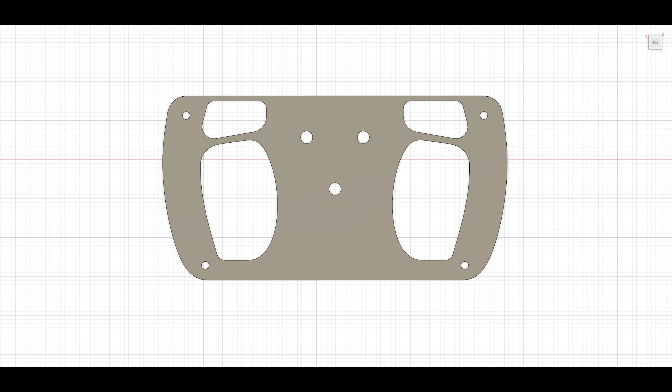You know what? I'm gonna do something a little risky today. There you go. Hello, everyone. So, let's see.

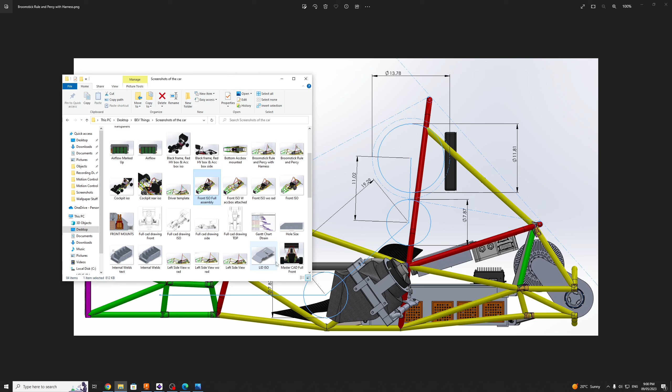So I will try to show you a photo. I'll take this one. Yeah, this one for example. So you can see how it starts from this corner, goes all the way around, wraps, and ends right there. So this is kind of like the allowable part because you gotta bend a tube, and these edges can be welded, but any of these corners, these radii, it should all be one tube, no cuts, no corners.

This is a base representation of what basically a car looks like without any wheels, suspension, stripped down, bare bones. Of course, not the most recent design, this is way back in the day, but it's a good representation of what I'm trying to show you guys. So, the FSAE rules, let's look at them, shall we?

T.1.4.2 is this: the topmost point of the front roll hoop, any vehicle controls must stay below the topmost point of the front roll hoop in any operational position. Basically your hand cannot go above this line. If it does, no tech compliance, and no racing for you. Minus 99 social credit.

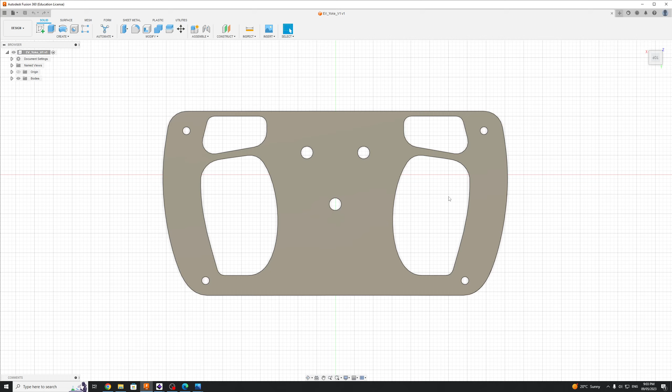So the whole point of today's stream, or today's shenanigans, is basically making little grippos for this cowboy. And by grippos, I just mean this is our water jet aluminum steering wheel, an example of it, or a model.

The whole plan is to basically create something for the drivers to hold so that it's a little bit more ergonomic, easier to steer, because you could use this, but it's going to hurt the driver during endurance runs or when they're trying to go as fast as possible on the track to set their autocross times, which is basically like a time attack. You only get 2 laps per driver.

It's like yeah, it's just a time attack. But yeah, alrighty.

First things first is this body needs to be not that thick. Alright, how about I do this? Because I brought this in from SolidWorks, because I'm too lazy to sketch this up all on my own again. Well, not again, but just do it in SolidWorks because it's a button and a half. What I am going to do is create a new component.

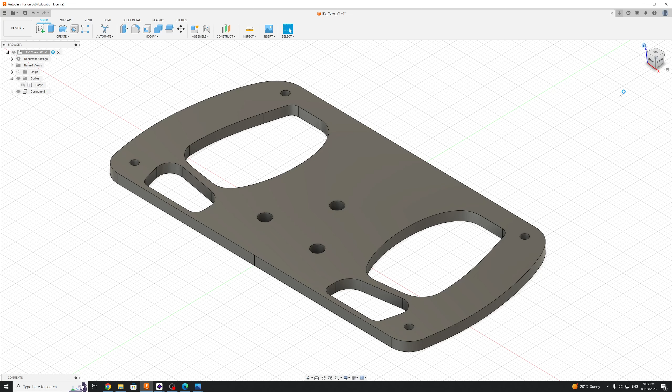Crazy, but yeah, so like I said earlier, the whole point of this is just to create nice little cutouts — I wouldn't even call them cutouts, just 3D printed grips. It's just ergonomics. It would hurt if you were holding a 1/4 inch plate in your hand and really wrenching down on it. It wouldn't be any fun.

And we kind of have to do this. Alright, I'm gonna take you guys back into the forbidden zone, or just straight Fusion. Alrighty.

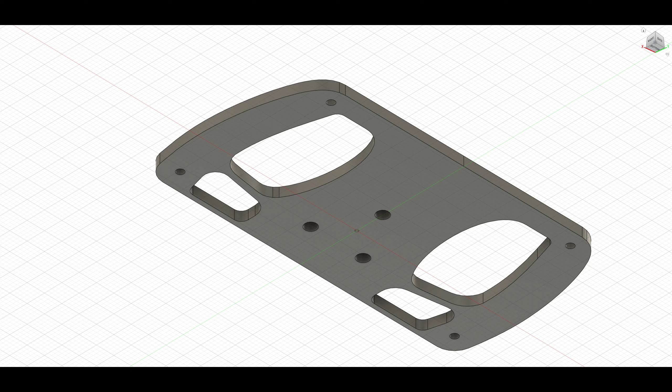Does this go behind the steering? Let's define this. This is the steering wheel. So we will have grips basically on this side, which would be facing the driver, and on the bottom side, away from the driver. So you're basically kind of wrapping your hand around these sections, and we need something to make this a softer edge, basically.

Alrighty, I'm gonna make this my home actually. Set current view as home. Alright, let's go. So basically what I'm gonna start off by doing is probably make a little measly sketch. I don't know how to explain what I'm planning to do, but

The best way I can put this is the way how we currently have the first iteration of grips. Actually, I do have them, so I'm gonna stop this right now. Our first few grips, which you can see right here — well, you can't see them, but they kind of look like that. They're pretty thin, not too bad, but again, whoa.

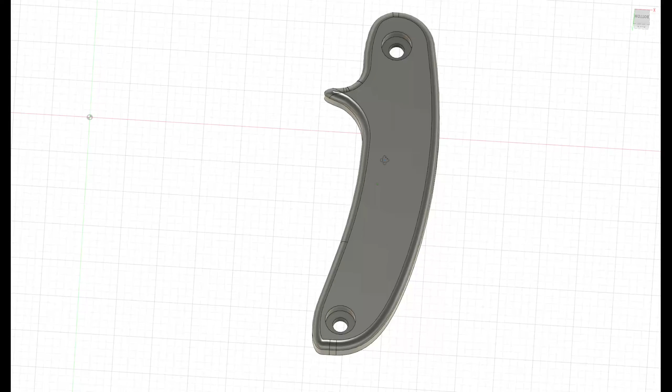Yeah, but then again, these pickle-shaped boys, they're not necessarily the most ergonomic. They still kind of hurt, especially around the thumb area, which is the main thing. For the most part, when you're driving really hard, really fast, you'll oftentimes loop your thumbs, if you're driving your own car, hopefully at a track, at safe speeds — don't do dumb stuff, people.

Oh wait, why am I alt-tabbing? Never mind. Basically, cool.

Where was I going with this? Yeah, you would loop your thumbs around these two regions, and this gives you most of your torque force, or just turning force, because it's easier to hold on over there, and life is better.

Let's set this. Ooh. No, okay. Alright, there we go, I think that's a better home position.

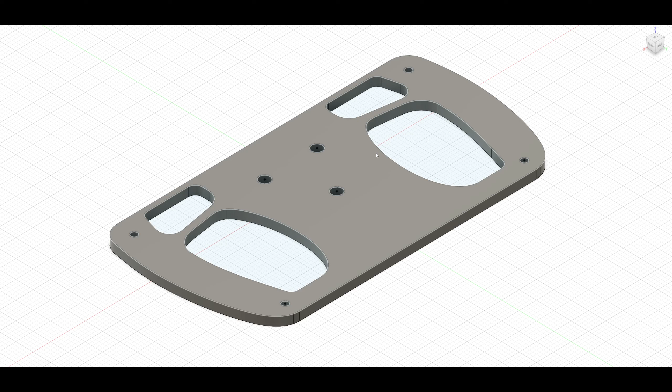So let's begin. I'll start off by bringing just these in as an example. You know, I should probably show you guys how - this would be a good opportunity to just learn Fusion.

So I'll just keep the complete display on and just remove that. Yep, that's probably better. Hopefully you guys don't do anything frisky.

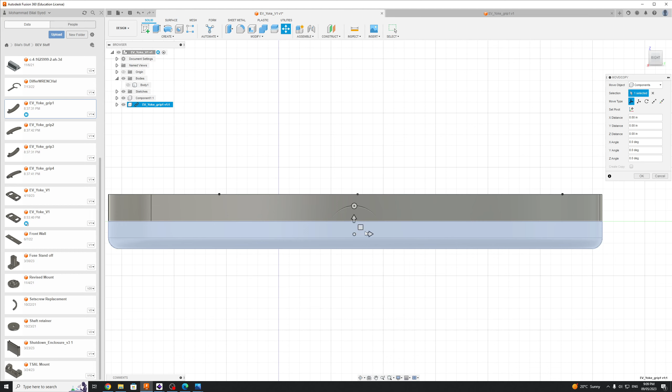Insert that into the current design, and you can see kind of where it sits, which is... ooh, not there. Oh wait, yeah, it actually sits right there. Never mind.

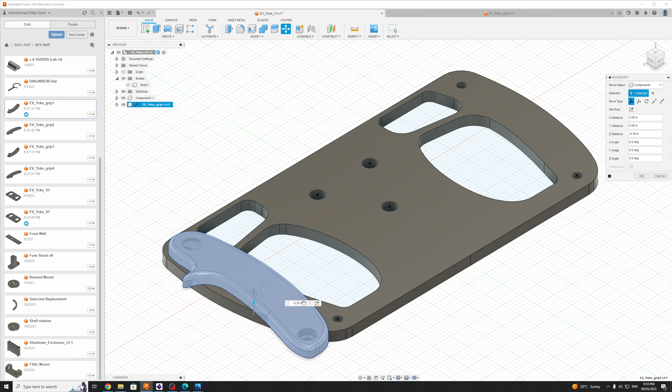But of course, that's not where it needs to be, so be gone. I'm gonna actually reinsert it into the drawing. Change that to 180. There's probably better ways of doing this, but I don't know them yet, so y'all are gonna have to yell at me some other day.

So Fusion, I've noticed, doesn't really have... well, it kind of does have an assembly system, but I don't know, I'm weird. I just haven't used it as much as I have in SolidWorks, or I guess it's not. You know what, let's see how this goes.

Simple, between two faces. Just position. Let's see how this goes.

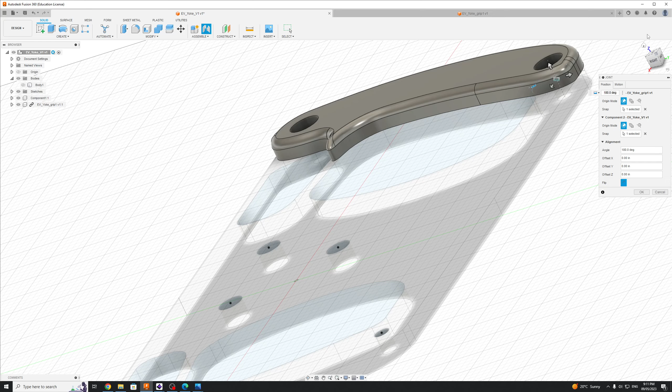Whoa, look at that. Yep, that seems kind of right. And this will actually help quite a bit, but then, well, this is just a representation.

I think I have to redo this all over again, solely because I don't think I can kind of remake these bodies, due to the way that they are. But yeah, I think this is probably a good way of showing you guys what they kind of look like.

So I'm actually gonna change this to an aluminum. Well, it's not anodized aluminum, that's for sure. It's just water jet, because we don't got a whole lot of money.

It looks more like this, but... polished satin. Yep, that's kind of probably what it is. More like - there you go, sir.

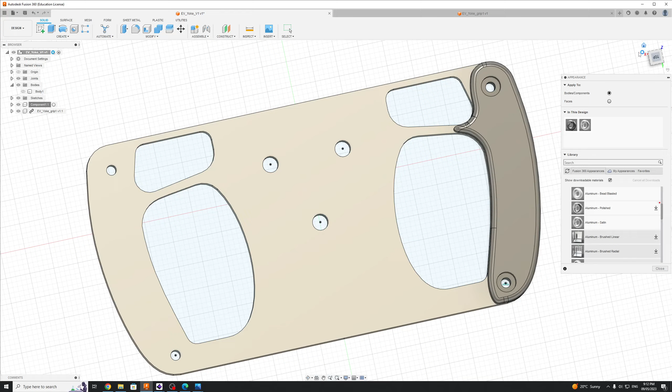Why are you white? Bruh. Said no one ever.

I mean, it's definitely that component. Oh well, I guess if we ever decide to render it - jeez! If we ever decide to render it, it'll probably show up better, but as they say, YOLO swag, young money.

Cool. Just gonna close the rest of these, because why not? Although I may need to come back to them some other time. Cool. Alrighty.

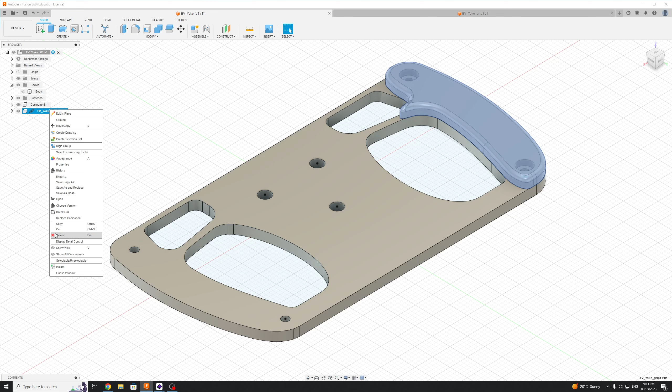Let's get schmoving.

So one of my supervisors when I first started out in the engineering field, basically on my first co-op, or first actually paid job, my supervisor, who also worked in Fusion, told me a lovely little thing that I like to remember, which is the first thing you do in Fusion is create a new component.

Don't just start sketching on the ground, although oftentimes I end up doing that, especially if I know it's not going to be an assembly. But usually when it is an assembly, the best thing to do is to have components. And so that's kind of what I'm going to start off with over here.

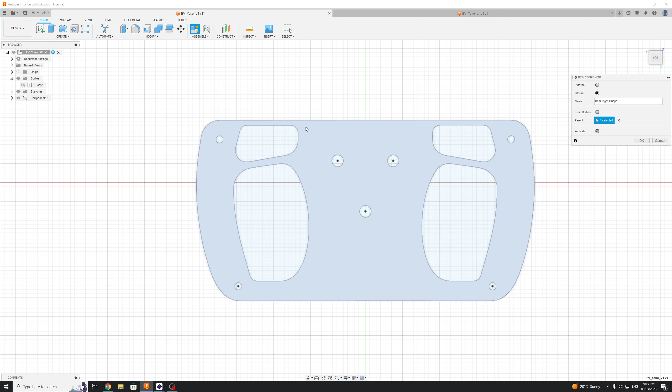This is going to be a fun little naming convention. I'll say this is the rear... right, bruh, god damn it, caps lock. Rear right, the parent here, I'll make that the parent. Although it probably should be something else. Can I rename you, sir?

So you might be wondering what happened, why you'd become glass. Well, the answer is right here, basically in the component tree. You can choose what you'd like to be working on, and the rest becomes kind of translucent. If you want them completely gone, you can press this, or there's probably a better method. I don't know why it's still showing up. Usually it doesn't do that, but YOLO swag, I guess. Well, it's probably because the bodies are... nope, that's fine, I don't know.

Can I kill the body? Can I? Well, I could just do that, but let's just say you don't exist. Can I suppress you? Suppress. Well, can't suppress you, I'm gonna keep you up there. Okay there. Well again, I don't know why I'd be doing that, but YOLO swag. I should really stop saying that.

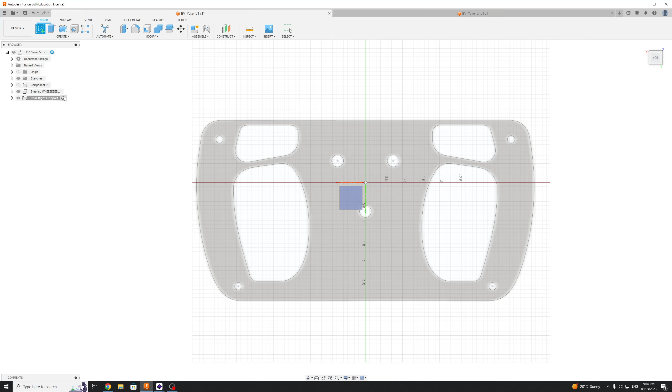All right, let's start off on this grippo. That's the unfortunate aspect of this. Back. Oh well, whatever. So these holes right here, they're basically for fasteners or basically anything else to kind of go in. Yeah, basically they just go in and clamp things to the wheel.

Start. Well, how about this? Start over here. Thing is, we want this to be kind of smooth and sharp at the same time. It's really gonna be hard to explain what I'm trying to do.

Good sir. All right, oh wait a second, why'd you do that? Bruh, okay thanks. Probably have to do it. Oh no, that's not it.

So the interesting thing about Fusion is, if you're making a line - and this is also the same for Siemens NX if you're familiar with it - basically you can make a line like that. Very nice. But let's say if you want to make an arc without having to do the whole shenanigans of making an arc, you can just kind of... okay never mind, guess I don't do that no more. What did it used to? Oh, I think if I start... oh yeah, there you go. If you start a new line, it kind of does that.

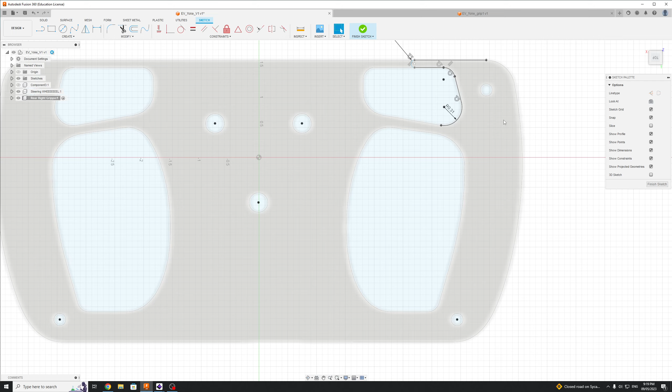Now you might be wondering why I'm not dimensioning things and making sure they're exactly where they need to be. The answer is, I am simply following the contours of this cowboy, of the steering wheel that's made out of glass right now. So technically everything should kind of align itself to it. But as you saw with the blue lines, some of them aren't really liking that idea.

But it's whatever, as I say. Oop, there we go, I have a lovely arc. Yeah, another reason why I really like Fusion is because it lets me do stuff like this. Like, oh come on, come on, where's the point? Where's the point? Come on, there's gotta be a special point. Perhaps there's a spline? Who knows?

Nope, go back, I guess I'll do this last. Oh okay, I see how it is. Interesting, I guess it goes kind of... okay I guess it's just... it's probably better in SolidWorks, but now it is kind of doing its own thing over here. Let's see. Fusion, do your thing. Cool beans.

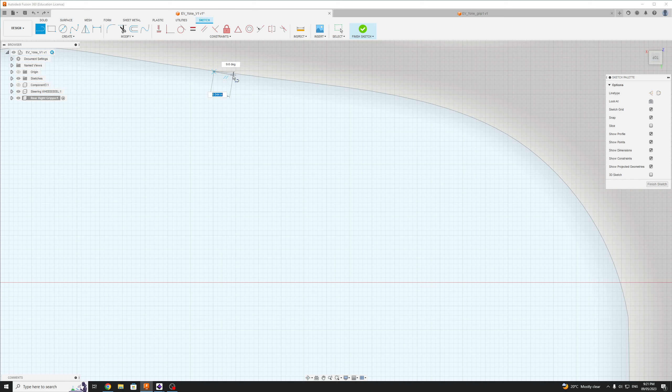So look at that, that's one whole thing. Interesting. You know what, why not? Let's do a thing. Okay, how about we not do that?

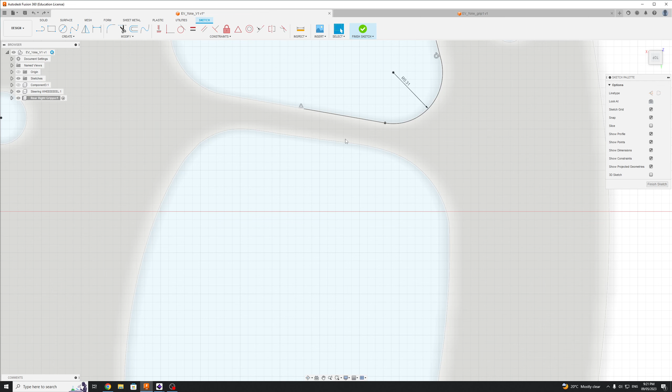Alrighty. Oh yeah, I keep on forgetting you guys can see my entire screen, which is kind of funny.

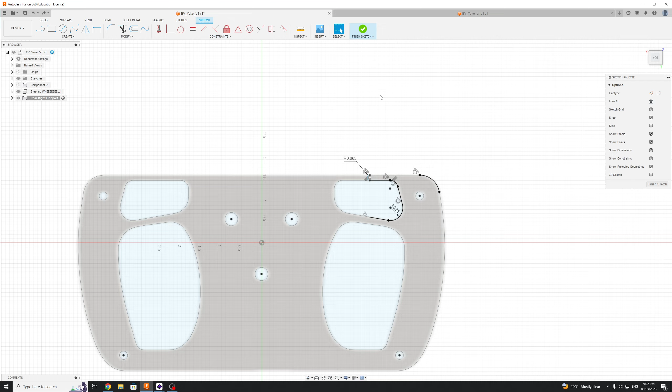Anyways, sorry about that, there's currently a fly running around my room. So if you randomly hear me clap, there was an attempt is all I can say.

I guess we'll start here, sir. Yeah. Better. Oh, okay. Yep, that'll work. Of course not.

By the way, in case you're wondering, I wouldn't call myself a CAD expert, hence the reason why it's taken me 16 years to do this. But, you know, it is what it is.

Ooh, I like that. Why did you... yeah, very nice, we're making some progress slowly. Just getting all the real cowboys done.

Why are you clapping? This is a no-clap zone.

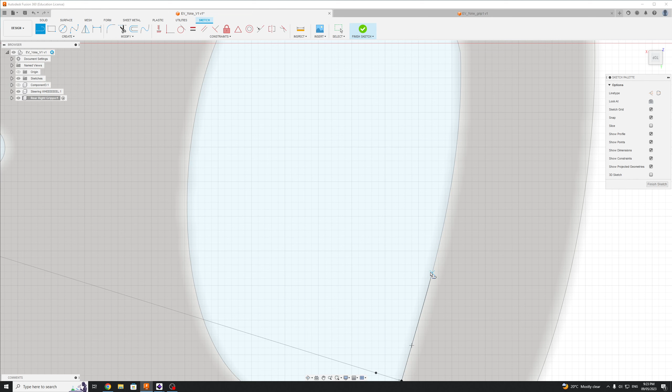In other words, I don't really know what I'm doing here. No! Oh well, what's coming to you? Bruh, the world should go, and everything in it. Ooh, that's interesting.

Oh, there we go, that's the snap point, which I honestly couldn't tell you. Well, I know where the other one is. Well, you know, now that I'm thinking about it, is there a way how I can just project the entire thing on? Project include. Project to project?

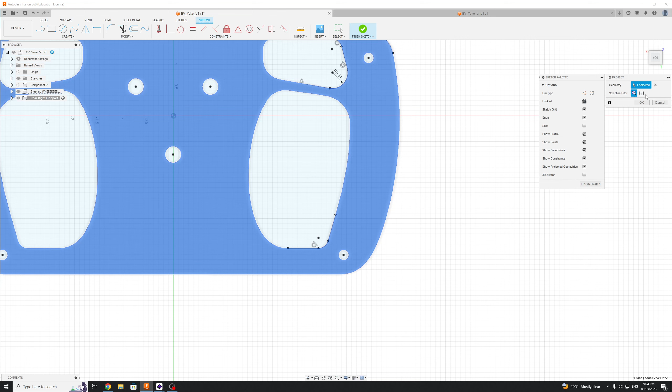Okay, what do you know? I don't need to do anything, I'm just that cool. Well, I don't know. Does this count? Can I? Okay, cool, I can do that.

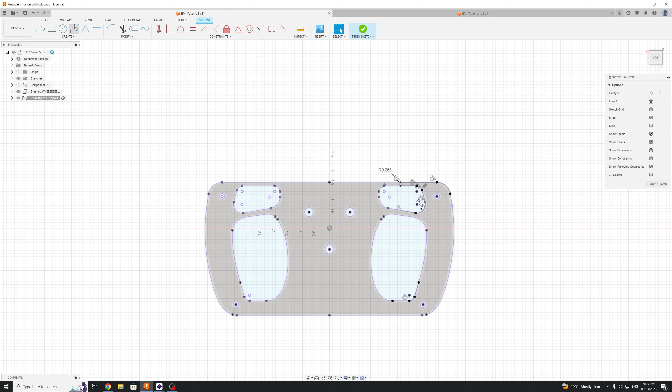Will it let me do funky stuff? No, I don't think it will. Well, let's see. Whoa, okay, interesting. Okay, well.

I'm gonna turn that sketch. Oh, that's the entire sketch. Alrighty, I guess that's good in some ways. Well, let me try something first.

Because the reason... well, I have to come clean, I done goofed. What the done goof is that I'm trying to basically make a grippo out of this little section here. But to the keen-eyed, you'll notice that it's open. It needs to be closed for me to make a grippo. So that's kind of what I'm going to do right now, which is kind of close off sections, or at least a tiny section of it, and pray that it works.

Wait, well, let me try this. Yeah, that'll work. Okay, yeah, that'll work. So I just, long story short, I just need to close off this little cowboy.

Can I kill the rest of you guys? Well, yes. Well, let's see. Ooh, I don't want to break you. That might work. Oh no, come back. Okay, how about this? It's manual mode. It's over for you guys when I can figure out automatic mode.

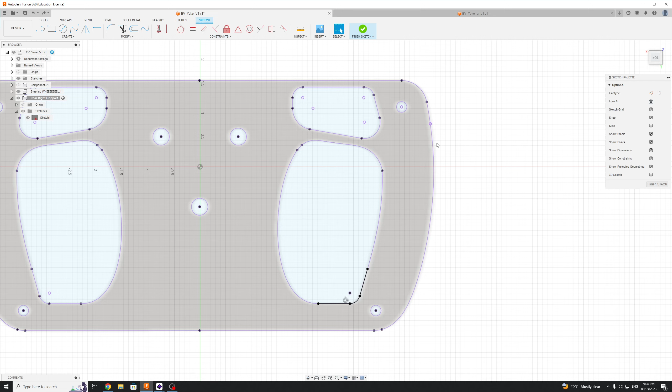That seems fine. Yes. Alrighty.

Come on, Fusion, you know I don't want to do that. As with... Oh, okay, fine, come on. How about... come on! Oh, I guess... oh, I guess that's how I started.

Like I said. Well, I guess it just doesn't like that.

You know what? I think this is a great opportunity to introduce you to my friend, Arc. I don't think this will be a center point arc, but it'll probably be a 3-point arc. So basically with a 3-point arc, you choose where you want it, and then you kind of do this little cowboy thing. I'm probably gonna make it like a perfect semicircle type beat.

Ooh. Okay, I think it likes this one. So, interesting thing is you can see this symbol right here, and if you were keen-eyed, you'll notice that it means tangent. Yeah.

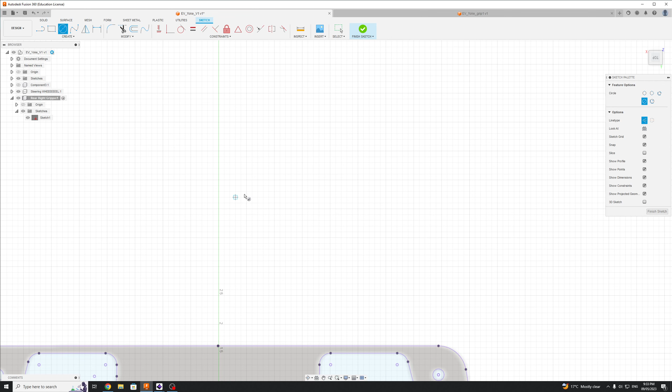I can sketch up a little circle, and of course I'd dimension this to make sure it's perfectly where it needs to be. Let's say I want a circle here, arbitrary place, and a circle somewhere around that radius, but in different positions. You can create construction lines and dimension all of these in different weird, funky locations.

And do any other sort of thing - if you want to make it a solid or real line for simplicity, you can just do that. No, you're not a real boy.

So this is an example of construction. Turn that off. I really do like the sketch palette in Fusion. I wish Inventor, made by the same company, had it. Inventor is, I think, for more professional use, and Fusion is for more hobbyist and startup use.

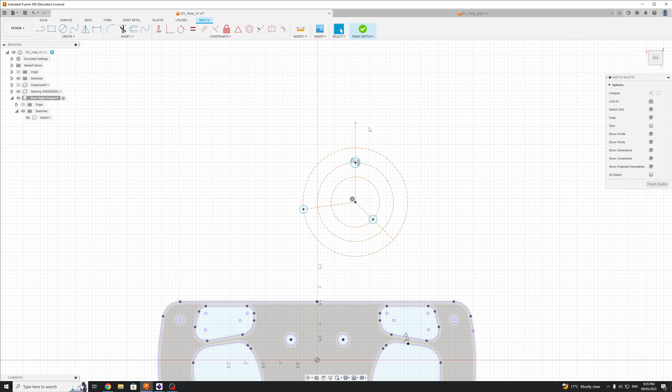I might get a little confused because sometimes I'm looking at chat and also looking at my stream. So if you see me stop and put myself on pause, it's because I'm trying to figure out what you guys are referring to, since I don't know where my stream is at on your screens. To me, time has passed; to you guys, I'm just coming around. But anyways,

Construction lines are these little dashed boys. You can use them to put things at particular angles. I'll give you an example here.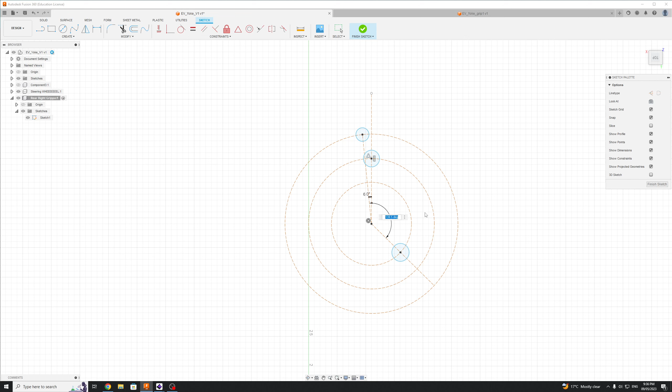Like if I wanted this and this to be at - throw a number out in chat - 6 degrees from there. There you go, it's now exactly 6 degrees. And if I wanted this one to be a random angle, I'll probably put in like there, and Fusion does that. So it's basically that much - that number is probably that many revolutions, and that's kind of where it is.

So it'll help you placehold things, and this is something I used for a project I'll be recreating on stream. I made it and it's a pretty cool thing, because it's using gears and planetary gear systems, or creating one. I wouldn't even know if it's technically a planetary gear system - I'll just call it a ring gear system, because it doesn't really have a sun and planets, just a ring and planets.

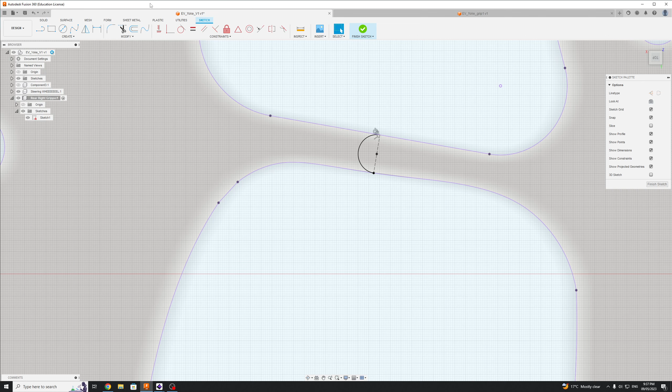But back to this cowboy - alright, I'll just make an arc. So we made a little construction line out of this, and that will help me pinpoint where I want this cow person to be. Alright, that seems kind of fair. Can I... why do you not like this? It's no like, I don't know why it's no like.

Well, it's definitely doing something funky here. I just really hope it does what I wanted it to do. This is a coin - well, delete that. Does that do anything? Nope, did nothing. Coincident with the... if you click and hold. Ooh, control point spline, interesting. Oh okay, well I guess this one. Yeah.

Hype train, hype train, what are you guys talking about? I have no idea what you guys are talking about. Like I said, I can't see my stream, I can only see chat. What's it - YOLO swag, I guess.

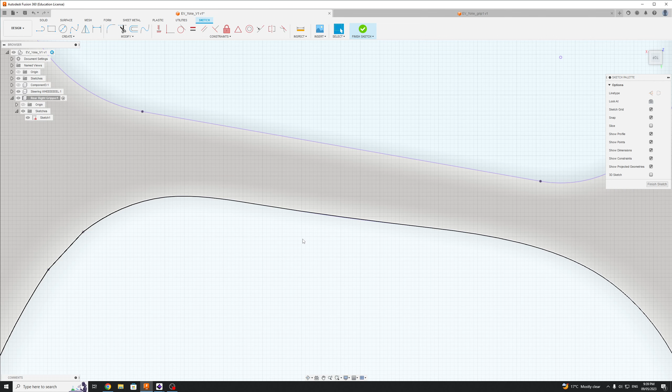Oh, for the planetary gear system - oh yeah, I'll probably do a whole little tiny segment fun thing. This will probably be the first time you might see a little bit of me, which is rather soon, because I don't plan on having a face with this new little shenanigans thing. Words I really should stop using - shenanigans. But yeah, I'm not planning on having a face.

I hope to never repeat what I just said in the exact same way I just did. But absolutely not, you'll see my hands - my lovely scarred up hands. Let's call that fine for now. Okay, we need to do this.

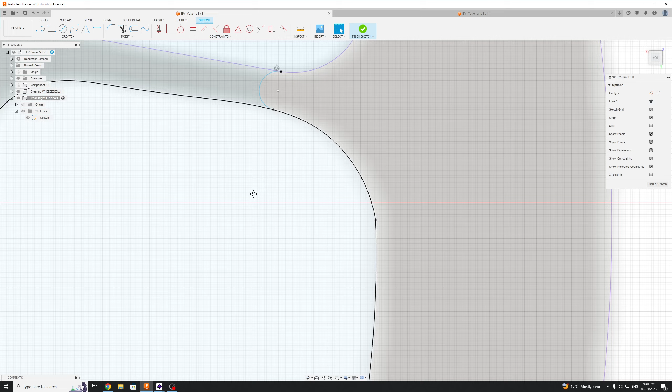You see? Now that I bridged it off, you can see how this is a little piece of this and that is a little, you know. But why are you not at the working? Can you move here? No? Whoa, okay, alright, she's gonna, whoa, okay.

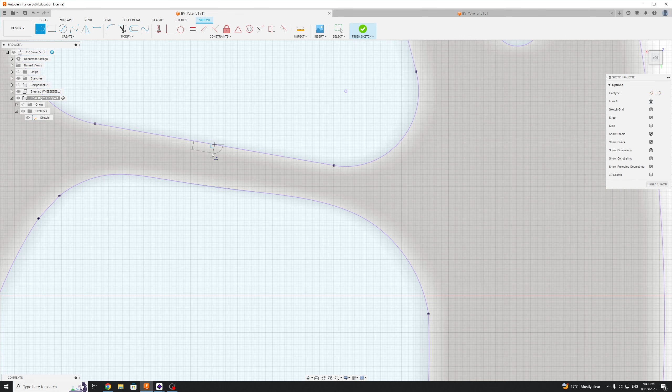I'm gonna delete this segment because I don't know why it's not doing what I want it to do. So instead, I might do a little trick I learned. I wouldn't even call it a trick I learned, it's just a random thing you can possibly do if you're running into the same issue, which is, once I... Well, I'll do this in the next step.

Finish that. Please work. Nope, it... Why you no want it? Why, what?

It's considering this a whole thing, but it's not considering this whole thing. But it's connected there and there. It's almost like a negative. I'm not going to be creating a negative, I want a positive.

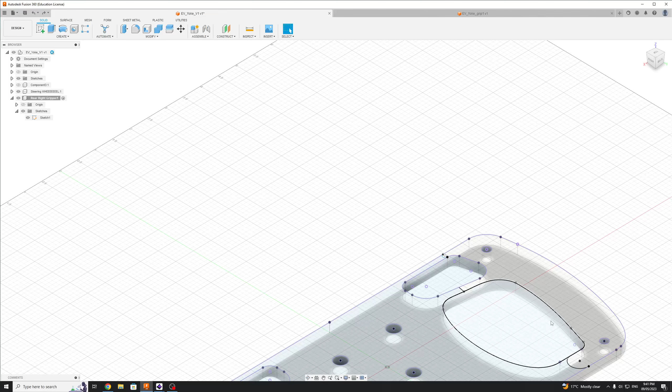Well, I don't know, let's give it a go. It does not. Well, yeah, it does this, but it doesn't want that. Interesting, interesting indeed. Gotta love CAD, gentlemen.

Perhaps it's this little member? I know you gave me a little bit of issues earlier. Oh, let me... Nope. There. Let's make you a little pickle boy. That sounds wrong.

Hello? Well, it's not that. Where is it? Could it be you? Delete you?

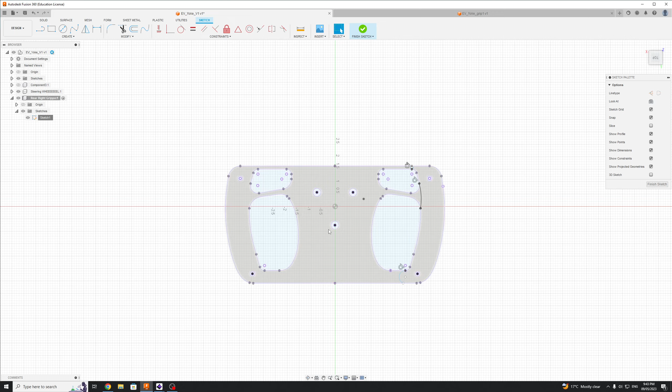Come on. Okay, well, now it isn't doing. Now it's not considering anything here. I wonder what's going on.

Well, that's one sketch line. Well, what's the first one? 2, 3, edge. Interesting. Can I delete you? And... oop. Oh, no, I guess I can't. Ooh, interesting.

Alright, it's doing something, I just don't know exactly what. Is that what we want? Again, it's creating a negative, which I don't understand why it's doing that. I don't think I have to close it all off.

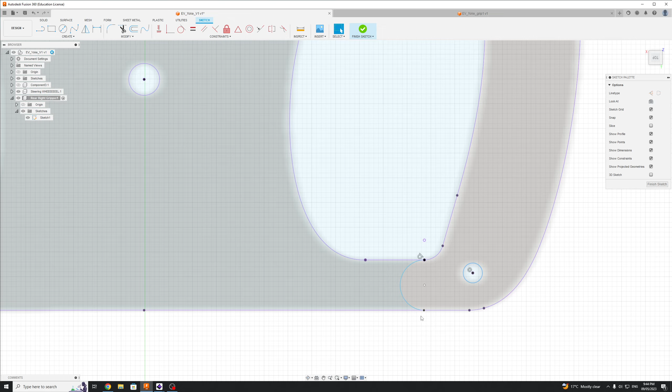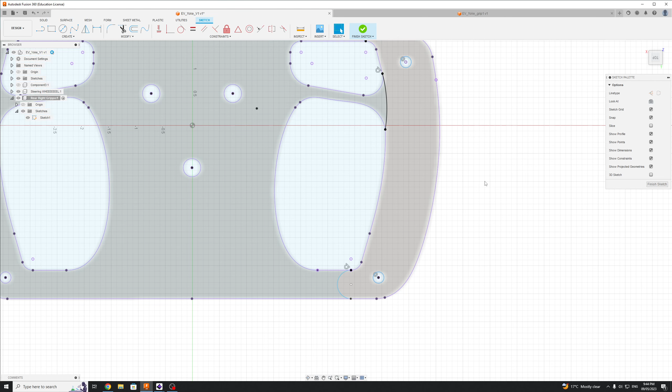Is it these? It would be really funny if it was those. Nope, not those. Hmm.

Oh, let's see again, it's like the weirdest things. There's something I clearly do not know yet. So I guess I'll have to figure that out as we go.

Okay, I just did a thing there. What did it create? Oh, okay, that's a sketch arc for some reason. Oh, because I held down the mouse.

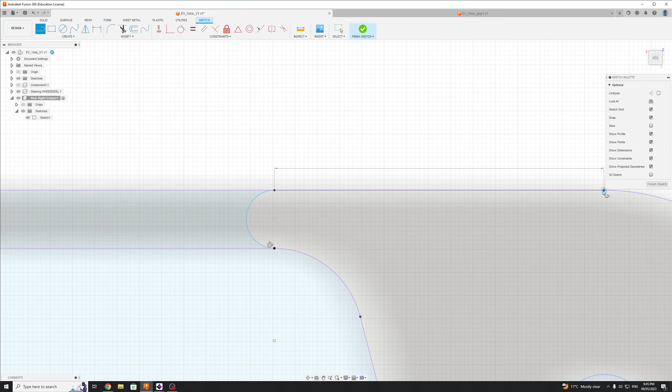Oh, I'm getting some weird laggy boys. Is it lagging for you guys too? Just gonna rotate my cursor around a little bit. I don't recall it being that laggy.

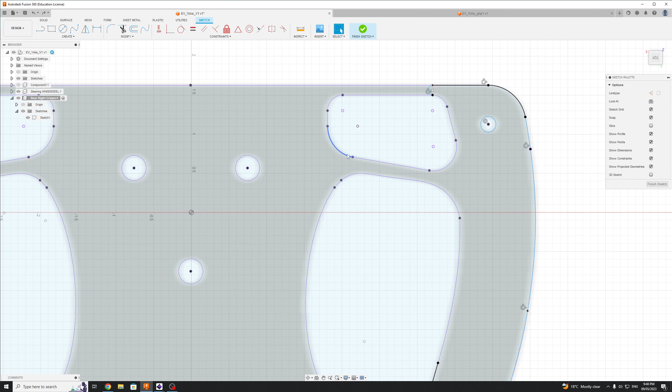I'm gonna make this a little bit more streamlined. Actually, I'm gonna probably join these two if I can. Yes, it'll let me, what a day. Let me join you two.

Probably a better idea. Maybe can I? No, okay. Now you see the predicament I'll have here, or this is kind of like a thing that I guess I have to take care of, which is, okay, not that.

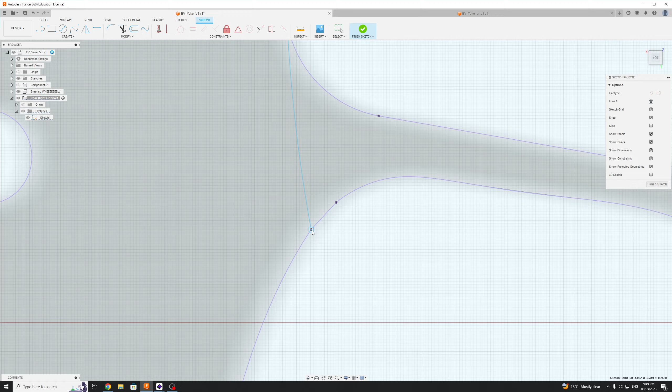So kind of making it a soft line, you know? Because sure, we have this right now, and you can see how it's kind of nubby. I kind of want to make it nice and something. Okay, nope.

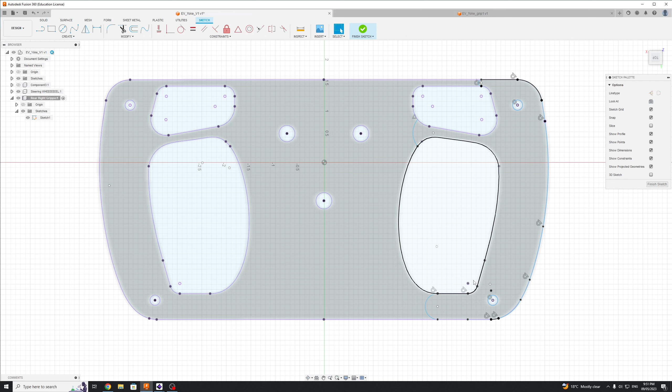Is that a good idea? So I'm kind of thinking about this, taking in the perspective, like while I'm designing this, I'm also kind of thinking of what it's going to feel like as a driver. You know, will this little nubby bit be really annoying? Because your palm will kind of wrap around this, I guess I'll call it a face for now, this kind of face of the steering wheel. So will that be kind of like a pressure point? Will it, you know, cause discomfort or possibly cause the steering wheel to, I don't know, would it reduce grip? Just never know.

Last thing we want is a cut glove, an angry driver, and a flipped car. So, yeah. I'm gonna try my best to help the driver maintain speed, asphalt, and talent. Because if you lose all three, you're in big trouble.

Yeah, that'll probably be fine. Well, now that I do that, I think, so this is another fun little construction line thingamabob. If, well, yeah, I guess so. Yeah, it's about, yeah, I'll say that's about centered. Well, it's not centered perfectly, but it is what it is when you have things made by different people through SolidWorks. I'm just using this design because this is the design we decided. Design lore, let's go.

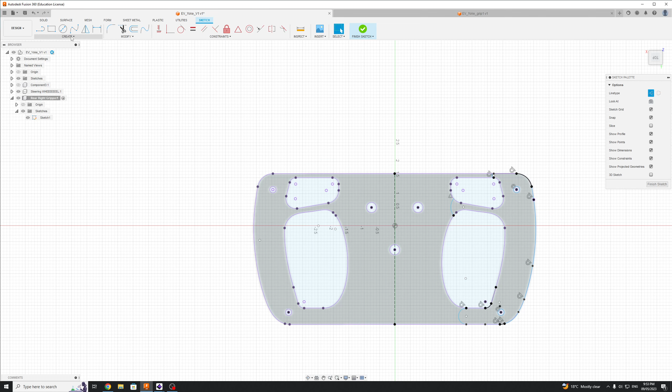Anyways. Yeah, I was just thinking too hard again. Okay, so basically, this is a mirror function. Very useful. Back in the day, they didn't have, well, they didn't have a whole lot of functions, to be honest. Everything was done repetitively. But thanks to, I don't want to say advancements in technology, but just, I guess, more, what's the word, the further introduction of CAD, that's computer-aided design software, into the workplace or just engineering environments, caused people to

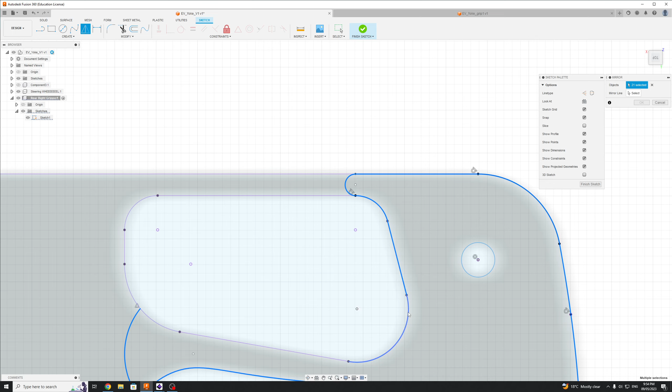put in lovely functions like this mirror function. So rather than having to do this exact same long process on the other side, instead I just get to select the things that I want to keep, and then using a construction line or an actual sketched line. Of course, usually I wouldn't like to have these in here, but I'm not exactly too sure how to get rid of them. So yeah, basically you see the outline that I'm trying to create, and then use a mirror line. So this is what our construction line is here for.

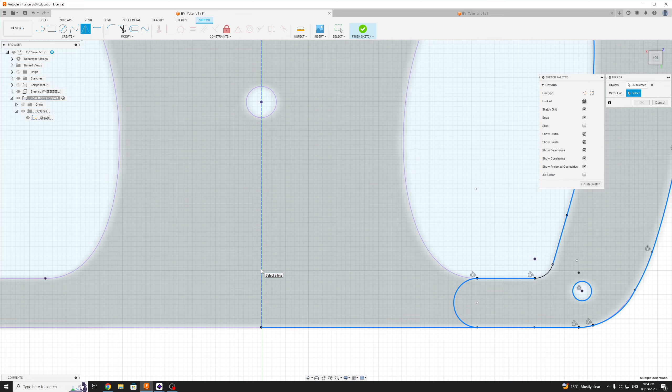So you can see that currently the construction line is black. Usually when you probably saw it earlier where it was kind of orangish brown, I'm going to call it orange. So when it's black, it's perfectly defined. You don't need to add anything to it. That construction line isn't going to change if you push, pull any of the points or kind of fumble around with it. And I'll give you an example soon.

So now we have a little mirrored. Whoa, okay, interesting. Nope. Okay, no, it's fine. Nope, is it? It's doing a weird thing again. Huh. It do be doing a weird thing again. What's wrong, sir? Oh, it was all going so well.

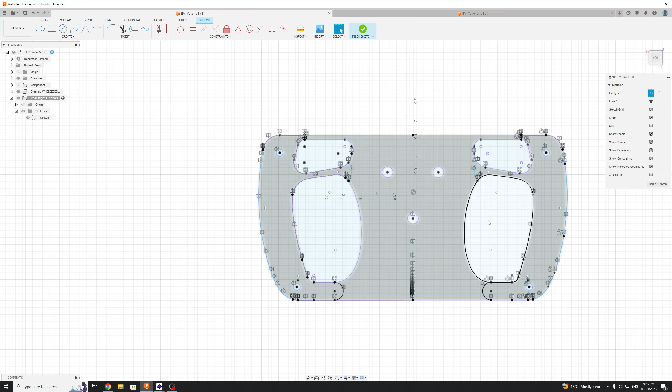So SolidWorks has this thing where it kind of checks for gaps in the sketch, and it might be able to tell you where the gaps are. I don't know if Fusion has the same sort of function. But yeah, as I was going back, CAD design, back in the day, I would have to kind of redo this entire long, tedious process on the other side, and make sure that everything was kind of the same. But now we have these lovely things called constraints, and patterns such as circular, mirror, rectangular, and of course the one that you saw me use pretty early on, which was a project.

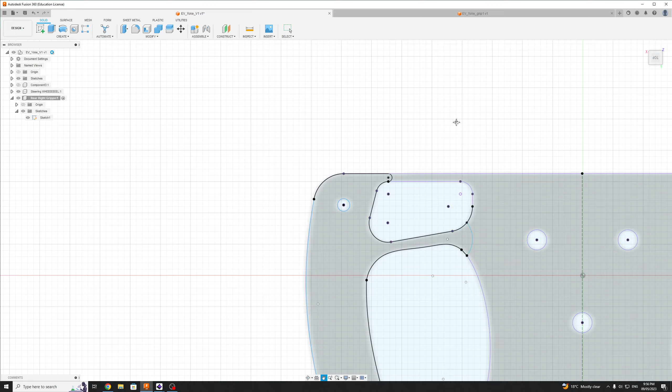So kind of like, you know, I was doing these all by myself. Luckily, on my first quote-unquote real job, I learned how to use the project function of Fusion. Well, in quotation marks, learned, because they kind of just told me like, hey, you can do this, and I was like, oh, okay. And so this is one of the few times I've actually used it outside of that job. But hey, I guess I got it down.

Okay, you know, like that. Remember, new component. Well, I guess in this case, because it's already within a component, I can call it a new body.

I don't exactly remember how tall they wanted this, but let's say that much. So this is back at the yoke, or the yoke grip, sorry, aka the grippo. Currently I've measured it, and it seems to be 1/4 of an inch.

Judging by people's feedback, a lot of things, when you're designing for ergonomics, you need a lot of feedback, a lot of tests from the people that are going to be using this, whether it's a machinist, an operator, a driver, or yourself. Ergonomics is all about making sure that there's less strain on the body and it's easier to use, easier to hold.

It's quite interesting. My most recent job is as a continuous improvement engineer, and a good portion of continuous improvement is ergonomics, making the process as streamlined as possible.

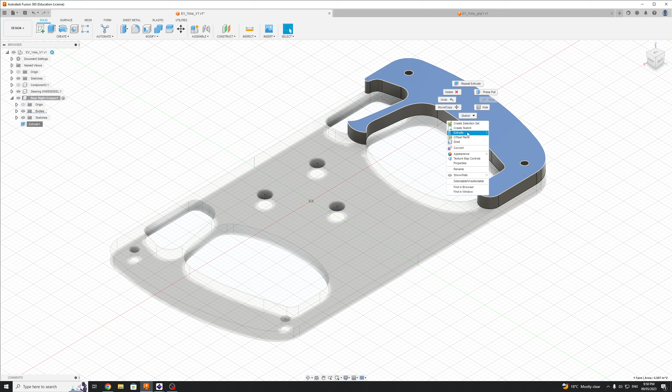Uh-oh, what happened here? Interesting. What happened? Why are you not doing the thing I want you to do? Why? Ooh, I know this one, or this song. I'm gonna take you back.

But yeah, basically making processes as efficient as possible, so that operators, it basically ups the efficiency of the production line.

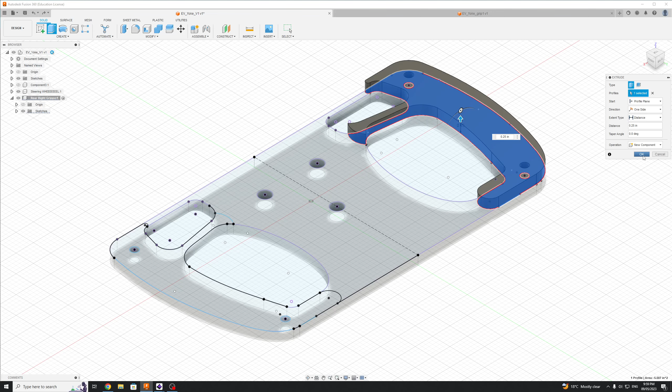Currently I work at a facility that runs 24/7, which for me that's a first, and that's rather an impressive feat. I know a lot of people that probably have more engineering experience or more real world experience kind of are like, oh yeah, that's just normal, especially for a high throughput, or high production volume type of deal. I don't know what I'm saying anymore.

So this is the fun part, which is this. Actually, now that I think about it, I don't think I needed to make that mirror, and I guess that's a good thing because I probably won't need it. But I wonder if I can make this a little body. I can. All right, cool.

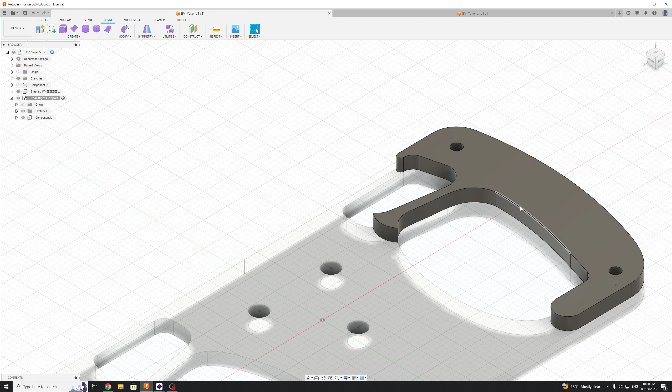So Fusion has this nice little thing. Let's see what it's called. It's not. Okay, never mind. It's basically a little... oh yeah, here we go, little form. There we go. Basically, you have these faces that you can sort of edit.

IRL in some sort of way, and it's, I would say, a good tool to have. It's just really nice because rather than having to know exactly what you want and where you want it, equation wise, or having proper dimensions, you can just kind of press and pull, quite literally, the face to where you want it. And we might use this today, we might not, who knows.

So for starters, I'm probably gonna round off a lot of these edges. Fusion, please cooperate. Is that what I want? Nope. Back. There. Yeah. So, ooh.

Okay, it doesn't like that. Oh, I don't want you to do 11 edges, I just want you to... Okay, so tangent chain basically just means chain the edges so that they're all kind of the same. Well, no, I'll leave that one out because that's kind of where it'll start changing, and the rest of this will probably be the same.

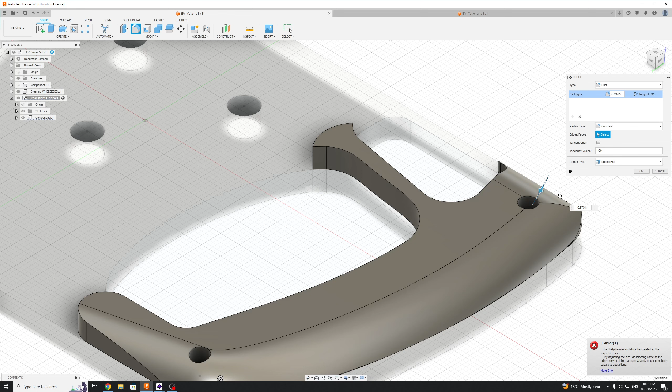Okay, if I can not do that. Come on. Okay, what is going on? Why is it doing that? Quarter of an inch.

Okay, so basically what I'm learning is Fusion don't like that, or I guess it's just not a good idea to do that. See, I don't like how it turns into this high point here, so... Ooh. Huh, interesting. That is interesting for sure.

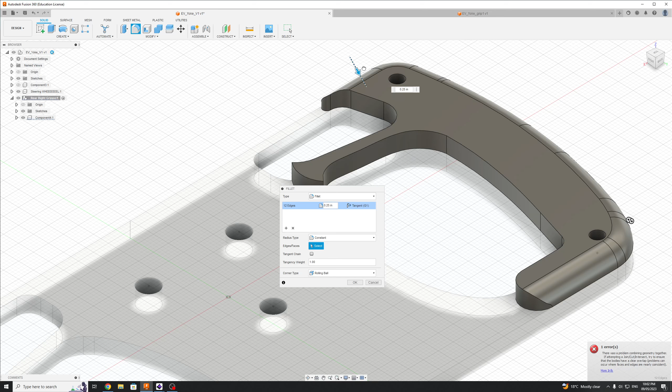What did I do here? Okay, 2.254. Okay, I guess it's probably a better idea to do a 0.25. Yeah, I'll leave it at 0.25, which is the exact height of this. And for this side, probably the same.

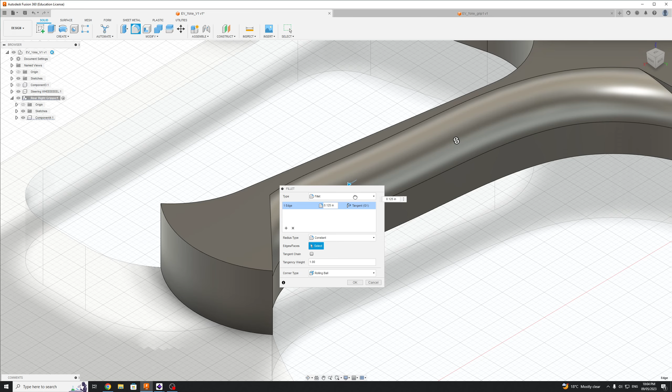Technically, I should do it the other way around because this is where your thumb is going to grip onto. So again, you got to really think about yourself holding this thing. Is it going to be nice? Is it going to be terrible? You would usually want to round off this entire area just so that it's easier to hold.

Of course, you like to give me issues. What's wrong? It just doesn't like this edge. Fillet.

What in the world is happening here? God knows. Will it work? No, it won't work. It doesn't like it. Well, perhaps if I do this and that, will that work? No, yeah, it'll kind of do its thing. I don't know whether this is a good idea or not. Because, yeah, that just does not seem right.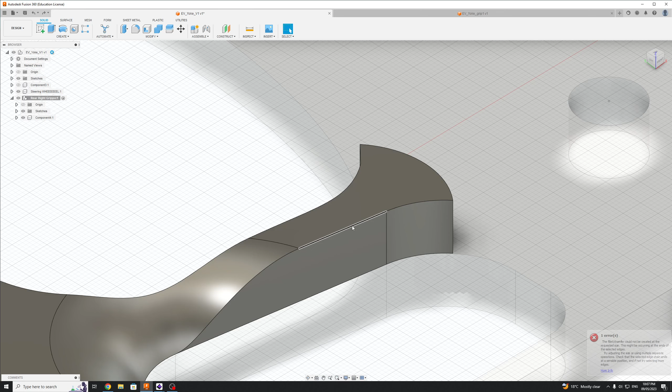Let me see if I can chamfer this then. No. So what chamfer means is basically kind of like take off, or just kind of slope it, or put it at an angle is the best way to explain it. But I think I gotta toggle this off. Nope, you don't like that. Oh, you like this? No, why are you doing that? Fine with this? Yes, okay. I guess a little.

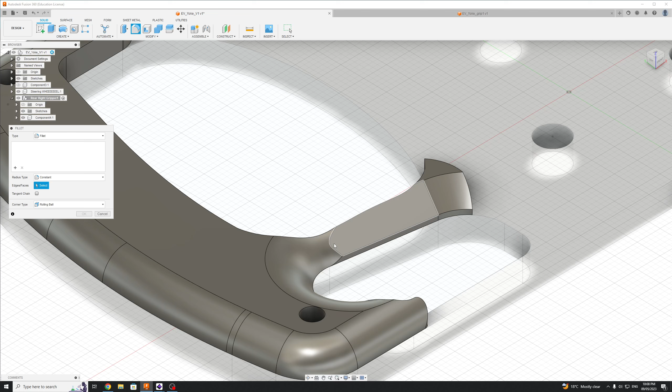This one will be a little interesting to figure out per se. Probably before doing that, I should have chamfered this in.

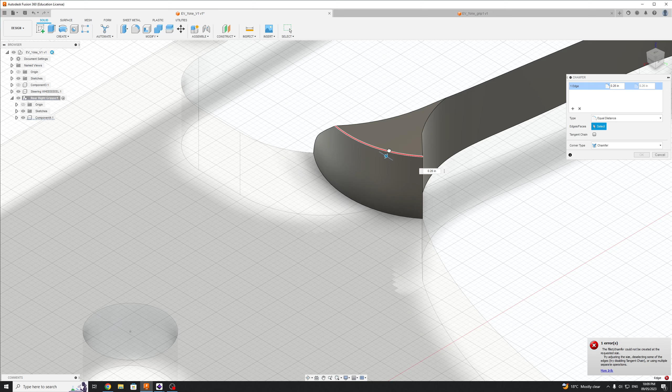Now that I think about it, this entire thing might snap off because there's nothing really constraining it there. So I think this is a go back to the drawing board sort of situation. And the nice thing about Fusion is that you quite literally can.

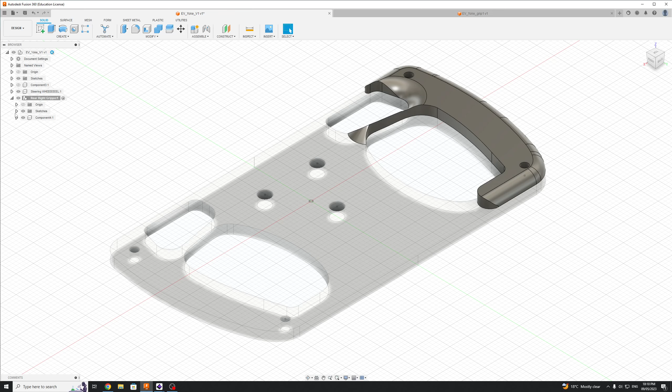Once, well, first I need to go back to the sketch. Excuse me. Nothing there. Oh, I'm looking at the wrong thing. Wait, hold on. If this is a... Oh, okay. Can I not make it one? Okay, never mind. Might have done goofed, but you know, it's whatever.

Gonna turn that off real quick. Edit sketch. That. And I will make a tiny little nub.

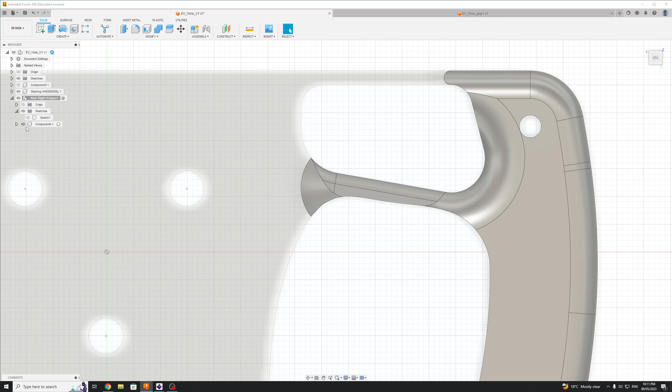What happened? I guess I gotta do this. And then... dissolve. No, that's not what I wish to do. Body. Can I...

I'm gonna undo that. I feel like that's a terrible idea. How can I make this one thing?

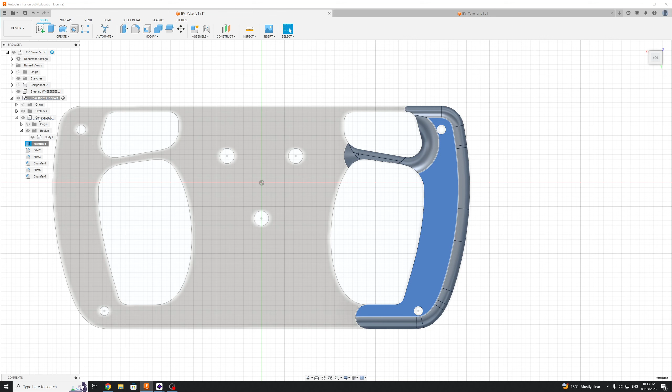Uh-oh. I did an oopsie. And I realized I haven't saved in a really long while. Not the very best.

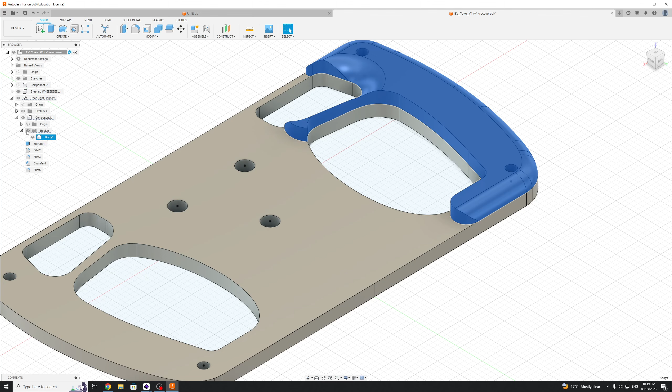Well, it's not that. Come on, man. What's the issue? Why can't I change you? It's not that. Well, I guess we'll have to figure this out a different day. I'm gonna save it for now, just so that we have something. I don't think this is what it was actually. That's definitely not what it was called, but it is what it is.